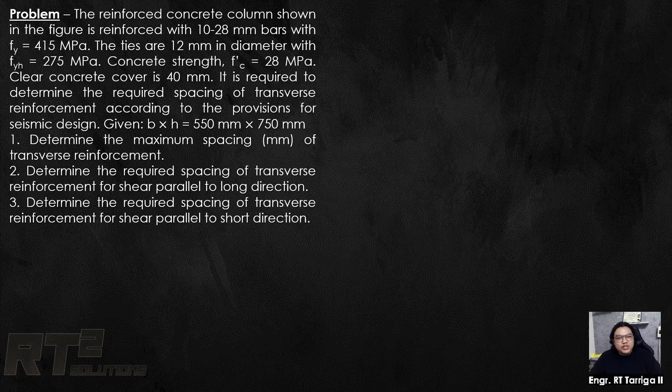So the reinforced concrete column shown in the figure is reinforced with 10-28mm bars with Fy 415 megapascal. The ties are 12mm in diameter and Fy 275 megapascal. Concrete strength FC prime is also given, and the clear concrete cover is also given. It is required to determine the spacing of transverse reinforcement according to the provision of seismic design. Let me expound a little bit on that.

This type of column design pertains to special moment frames - those which are permitted to resist lateral loads such as earthquakes. Back when the special moment frame wasn't invented yet, the only thing resisting lateral forces were shear walls. So if you imagine past codes, past buildings, the shear walls back then were much thicker than what we have now, because that was the only thing resisting lateral force.

But now, of course, the frames are there anyway, because a building is composed of many frames, in two directions, many frames, beams or frames. There's already columns and footings there, so might as well use them to resist earthquake or lateral forces. That's why it is called a special moment frame.

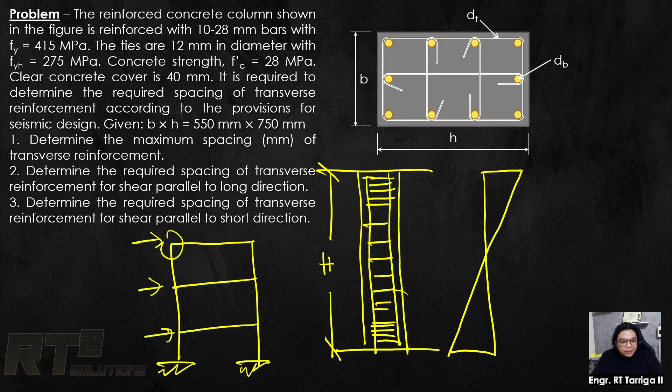And the second reason is, in a frame - let's say that is a frame - the lateral forces are distributed to act on the joints of the beam and column. That's where the large shear really is, where the lateral force will act.

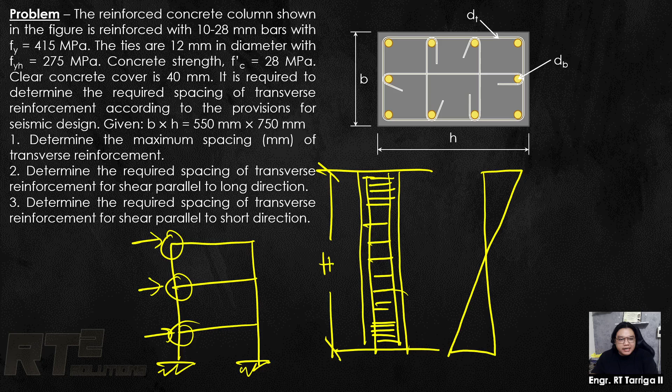Okay, so that's just the quick background. Now, before we can solve this one, there's actually a code attached to this. Don't worry, for the board exam takers, the code will be provided during the exam. All you need to do is be familiar with how to use it, and what notations are being used in the formulas and what they mean. I'll be discussing those.

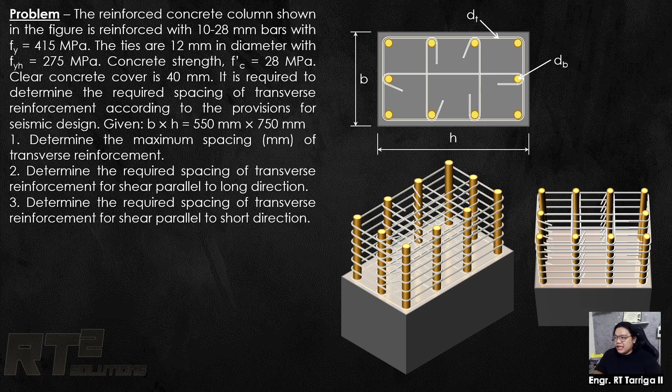So, the question is about the spacing of this lateral ties. Okay, next, columns for special moment frame.

So, spacing of transverse reinforcement shall not exceed the smallest of A through C.

Let's say here, first, 1/4 of the minimum column dimension. So you can see here, you have an example of a column section. Most likely, the minimum dimension would be B, with respect to the scale of the column, B by H. So 1/4 of B.

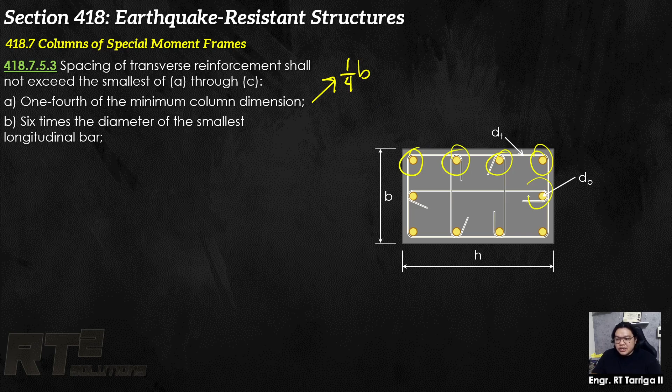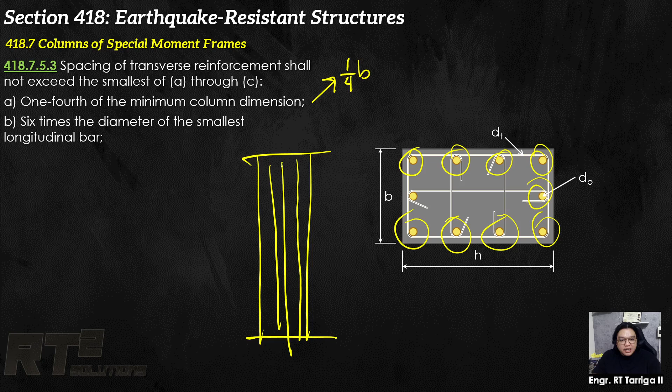And then the second one would be 6 times the diameter of the smallest longitudinal bar. So these are the longitudinal bars. If you look at it in longitudinal view, the column, those are the parallel, upright column reinforcement - those are called the longitudinal reinforcement. On the other hand, what we call those on the other side, the ties, those are the transverse reinforcement.

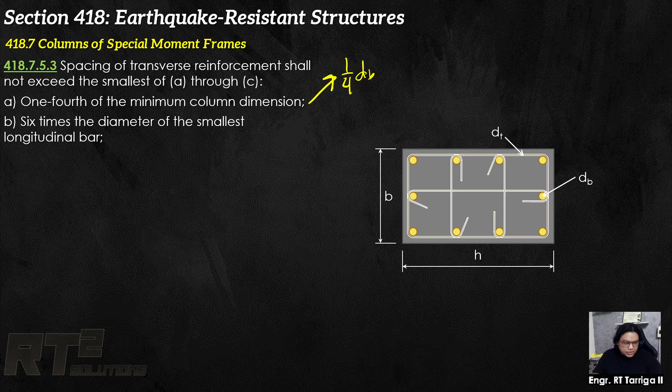Transverse, okay. So let's continue. Part B is 6 times the diameter of the bar, the diameter of the longitudinal bar. Then C is SO, where it will be calculated with this formula.

100 plus 350 minus HX over 3, for SO - these are the criteria, A, B, C. But for this SO, it shall not exceed 150 mm and need not be taken less than 100 mm. So therefore, before you compare SO to A and B, you will determine first that your SO is less than or equal to 150 mm and not less than, it will be greater than or equal to 100 mm.

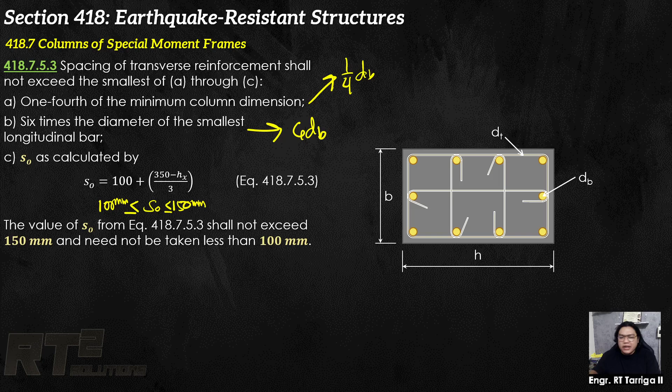Okay, so HX is the maximum center-to-center horizontal spacing of hoop or cross-tie legs on all faces of the column. Later I will expound on that one. How do you get HX?

So on the other hand, this is the maximum - you should not exceed this. But it doesn't mean this will be the required spacing. There's a difference between required and maximum.

Because, let's say the maximum spacing would be 100, or 120 mm the maximum. Then you found out the required spacing could be 90. So 90 would be chosen, because you didn't exceed the maximum. Then required is 90, right? It doesn't mean that when it's required, it's the maximum. They are two different terms.

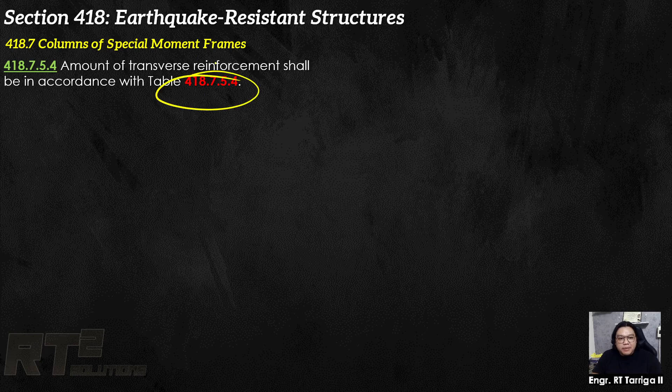Now, how to determine the required spacing? You will base that on a table, 418.7.5.4. So that's the table. Just take a peek, later I will discuss all of this.

Okay, so for most of the board exam, usually the FC prime is low strength concrete only, not high strength concrete, not more than, less than or equal to 70. So most likely we will just focus on A and B for the tied column. Anyway, this is the tied column, and this second one is for the spiral column.

That's the tied column and spiral column. And also, we will be focusing only for spiral on D and E. The ones on C and F, those don't come up. So let's focus only on A, B, D, E for tied and spiral column respectively.

Because if you don't know this class, it's also useless if this is given in the board exam. The code is being provided for the board exam. But if you don't know what is being asked for the notation, it's also useless, you can't solve it. Especially here, the terms are not really clear, because sometimes it's not clear, English, so to speak.

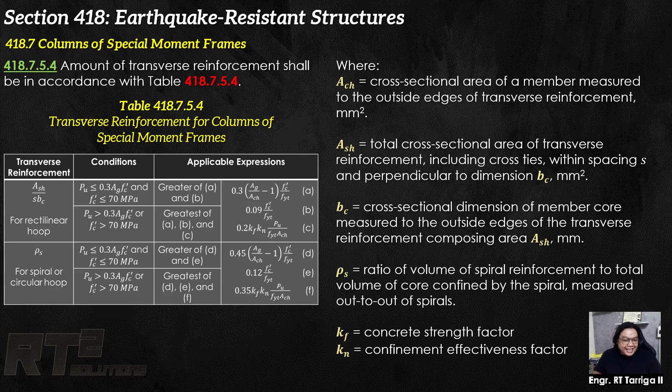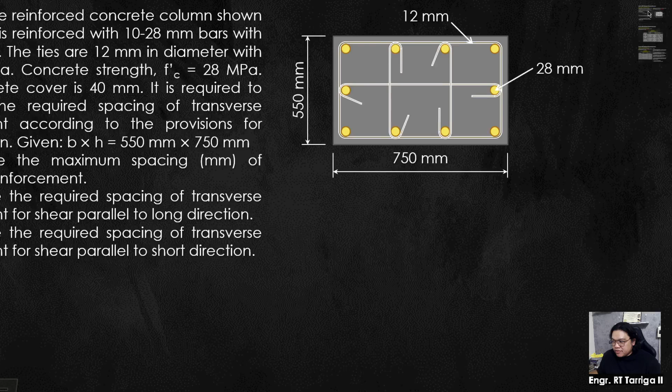Anyway, let's continue. Now let's first solve part 1, maximum spacing of the transverse reinforcement. So that pertains to here. This is what we base it on - these three: 1, 2, and SO. Three bases for us.

Well, for A and B, the first two criteria of this maximum spacing, we can actually solve already, because B and the diameter of the longitudinal bar are given. The only one we can't directly solve is SO, because we still need something, but it's solvable. Okay, solvable. Let's proceed.

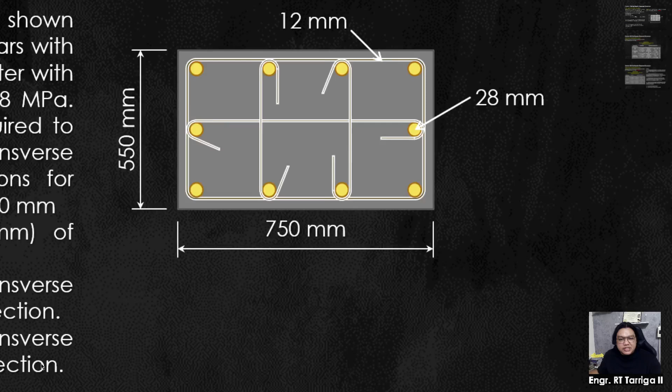First criteria. So the criteria, let me summarize based on the list: number 1, 1/4 of the minimum column dimension. That would be 550, right? So 1/4 of 550, that is 137.5.

Number 2, second criteria is 6 times the diameter of the longitudinal bar, which is 28mm. That would be 168mm. Actually, if you imagine this part 2, cross it out.

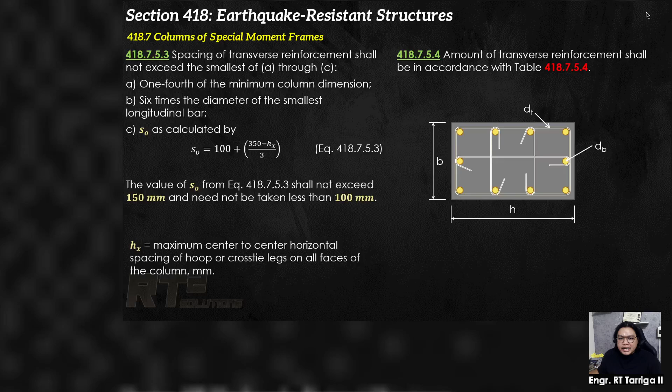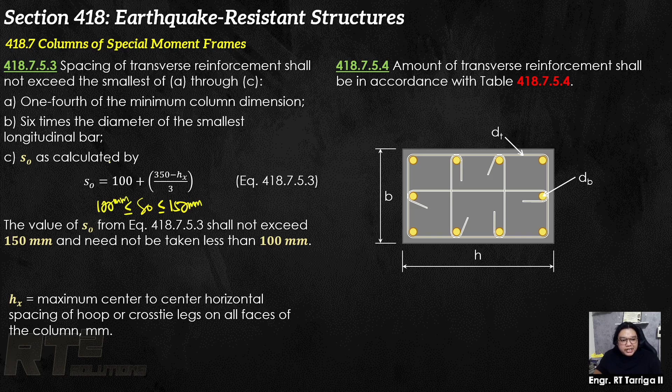We won't use this. Why? Because if you observe, the code mentioned earlier that SO should not exceed 150. I mentioned that earlier. So any spacing that exceeds 150 will not govern as SO. So 150 is really the maximum. I hope that's clear. This 168, we won't consider it.

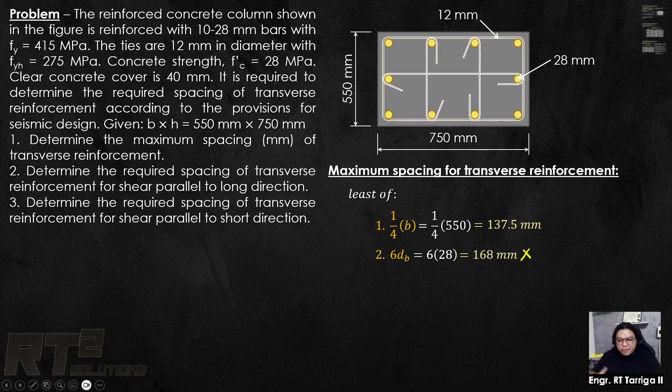What we'll compare now is criteria number 1 and criteria number 3. This part 2, criteria number 2, is gone - greater than 150, so it won't govern. We're down to SO. So the question is, what is HX?

What is HX? It says here: maximum center to center horizontal spacing of hoop or cross-tie legs on all faces of the column.

Let me clear this. These are the outer hoops, the ones surrounding. These single legs are called cross ties. There are many terms for this especially in actual practice - single ties, inner ties, cross ties, many terms. These three are cross ties, and this is the outer hoop.

I hope you understood. Now, HX is the maximum center to center horizontal spacing, in all faces of the column - actually all of these, plus this, plus this. Actually there are 5. 1, 2, 3, 4, 5. Which one is the largest? That's HX.

That's HX. So it's a bit of a hassle, right? A bit of a hassle because you will check all 5 of them. But I have a suggestion here that might help us reduce the number of possibilities. Instead of 5, let's make it just 2.

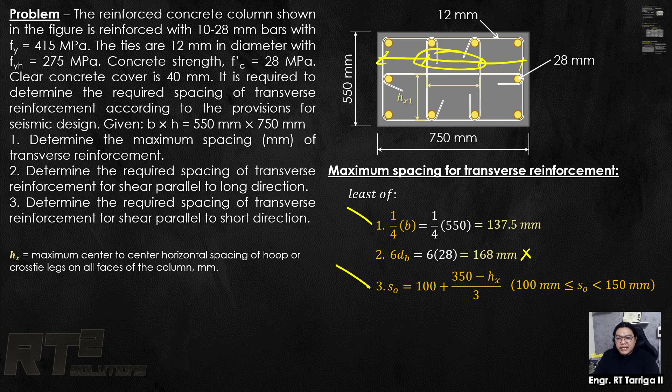For the horizontal, same thing - out of these 3, you pick one. Obviously this one in the middle is the longer one. That becomes the representation for the horizontal direction.

So out of 5, only 2 you need to check, which will become the larger value of HX that we substitute. I hope that's understood. But what really is HX? Center to center spacing, clear?

Center to center spacing. Now it's very convenient for us if we determine this first - I will call this Z, the center to center of the bar. Because class, if we have center to center of the bar, you just add half of the diameter on each side - half diameter of the longitudinal bar, and half diameter of the ties to solve for H.

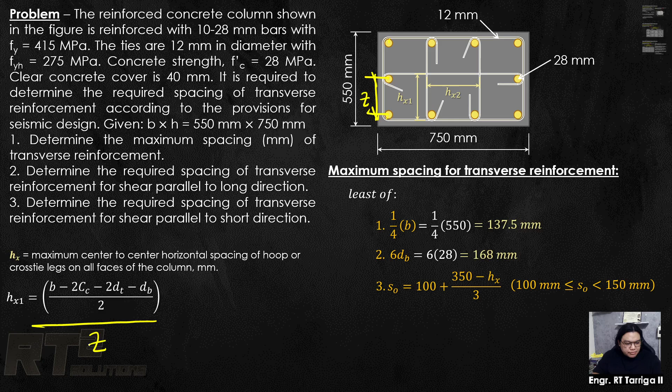Okay, therefore you can solve HX - 249mm, right? 249mm. So with that, you have 249mm.

HX2 now - actually same thing. This formula, just replace it with H, because that's already H. Replace it with H, then divide by how many spaces - not 2, but rather 1, 2, 3. That's the same thing, automatic, you get it.

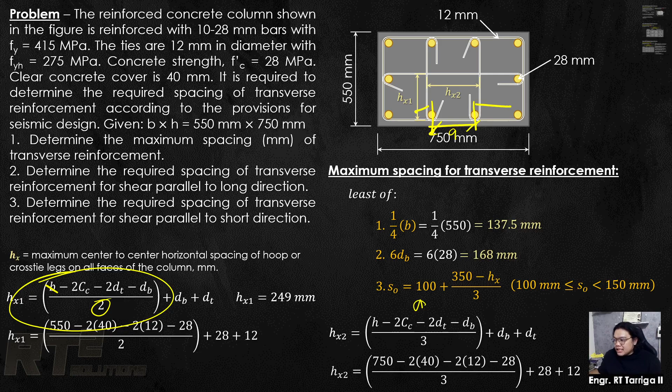We get 246. I'll give you time to internalize that - 30 seconds. You can pause this.

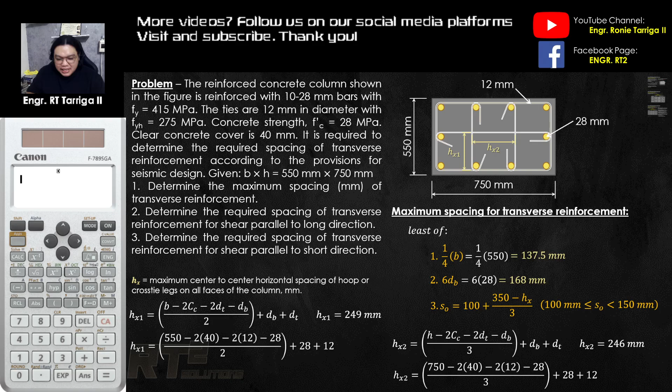So with that, substitute HX as 249 here. Substitute, you get 133. Now check, it's less than 150, that's okay. Then it's greater than 100, that's okay. So, this is really it.

It should be within 100 to 150. Now, compare S to 137. Actually, this is the governing value. S-max is 133.66.

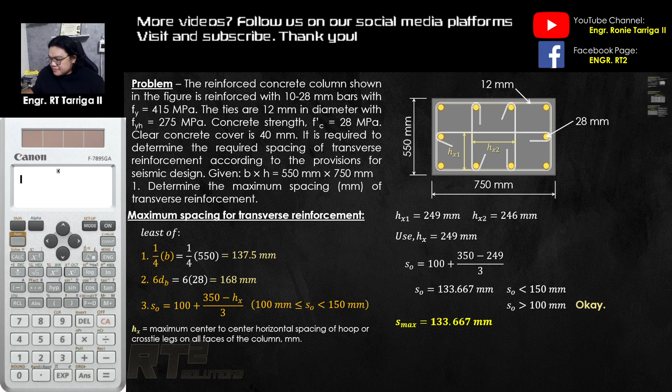I hope you get it. So what this means is the maximum spacing would be 133. So you shouldn't exceed 133. Maximum, okay, that is maximum.

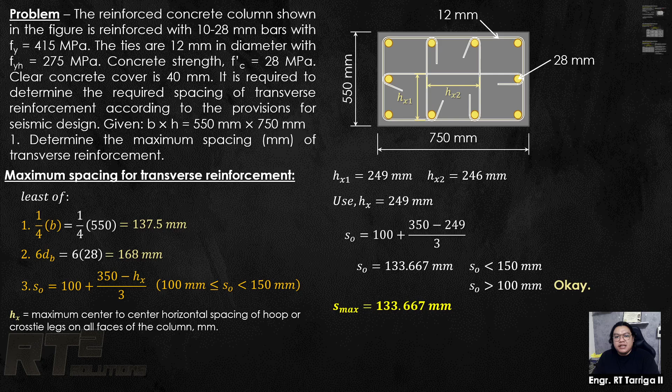Now for part 2 and part 3, you will calculate the required spacing. Number 2 asks: determine the required spacing of transverse reinforcement for shear parallel to the long direction. This shear is from earthquake, seismic, acts like a shear, lateral, shear parallel to long direction.

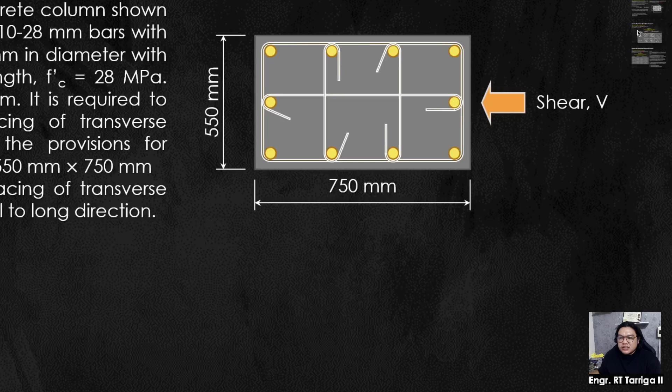What are our criteria for this required spacing? This is it, Table 418.7.5.4. We'll focus on the tied column here. So for transverse reinforcement, ASH over S times BC must be equal to the greater of A and B, these two formulas.

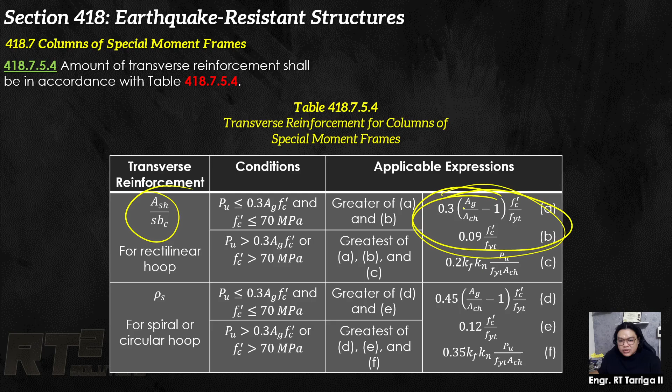Whichever is greater, use that to solve for the spacing. That's it from this table, from the code. This is what we consider. Equate ASH to these two, that would be our two criteria for the required spacing. I hope that is clear.

So the question is, do we know the terms ACH, ASH, BC, AG? This one, the gross area, is probably the only one we already know.

ASH, this is given, FC prime, FYT. FYT would be the FY or the steel yield strength of your transverse reinforcement, that's why it's called T, transverse reinforcement. Okay, let's go one by one.

Let's start with ACH. It is the cross-sectional area of a member measured to the outside edges of transverse reinforcement. Actually, this is called the core area.

Just subtract the clear cover and that's it. That is the cross-sectional area. So in this case, to remove the clear cover, we get X and Y. The area of X and Y, that is ACH. Let's start with X: 750 minus two clear covers.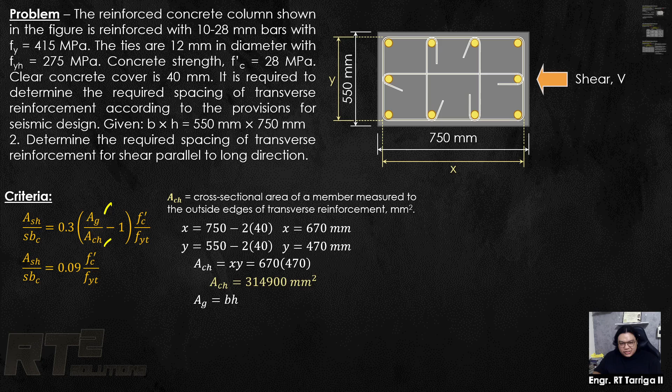Okay, that's the core area. Then, don't forget the gross area, because that might not be solved yet. Gross area, B by H, meaning the total area. So we're good with this too.

Okay, let's solve ASH first. This is BC, this is BC. It's perpendicular to the shear direction, including the reinforcement 1, 2, and 3.

I hope that's clear. So BC is like Y minus one tie diameter, center to center. Parang HX but hindi kasama yung cross, between outer hoops lang, between outer hoops. I hope that's clear. So as you can see, meron tayong ASH, meron BC, AG, ACH, kompleto na.

We can now solve for the criteria for the spacing. Ready? Let's solve. So if you can see, criteria number 1, let's solve this.

Substitute ASH, S unknown, BC. This naman is AG, this naman is ACH, FC prime, at saka FY. Masolve, lalabas yung spacing.

78.252 mm. Not yet the answer. Not yet the answer. That's the first criteria. The second criteria is this one.

0.09, 28. Okay, ASH, BC. Solve for S. Siyempre, the closer the spacing, mas safe. You will use the smaller spacing that governs, para safe.

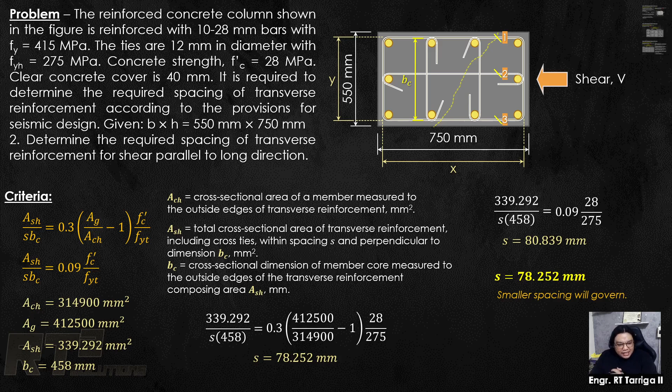I hope that's understood. Okay.

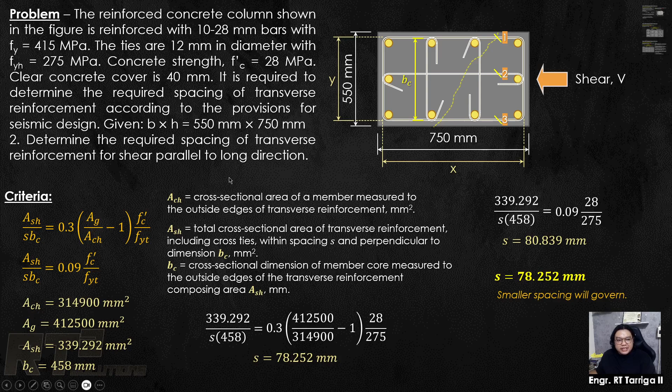Next one, I think this would be the last number. Same question, but the shear now is parallel to the short direction. Short direction. Okay, same criteria, class, same criteria.

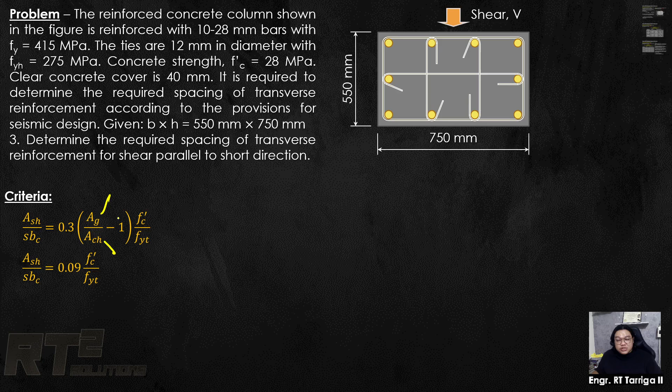And actually, regardless of the direction of the shear, itong si AG and ACH will not matter. Pareho pa rin yan, hindi mag-change. Ang mag-change lang, dependent on the direction of the shear, would be ASH and BC. So ito, wala na to, okay na to.

If you got it once, then you can use it twice for the short and long direction.

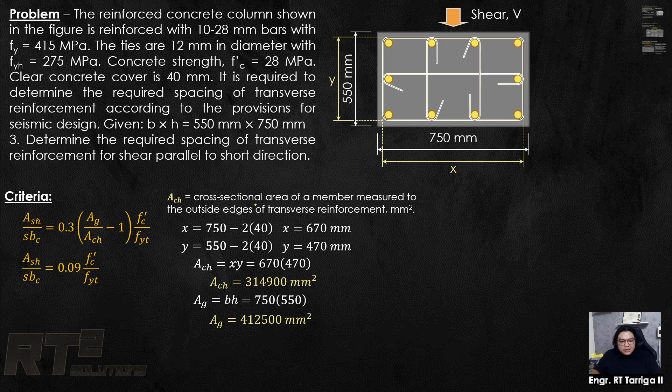Okay, let's solve ASH and BC. Obviously naman, kasi dito naman yung shear, count mo lang yung parallel na mga reinforcement, yan na yung legs. Actually 4. No? 1, 2, 3, 4.

Okay, so ito yung crack niya. 1, 2. I hope na-gets. Okay, so with that, 1, 2, 3, 4.

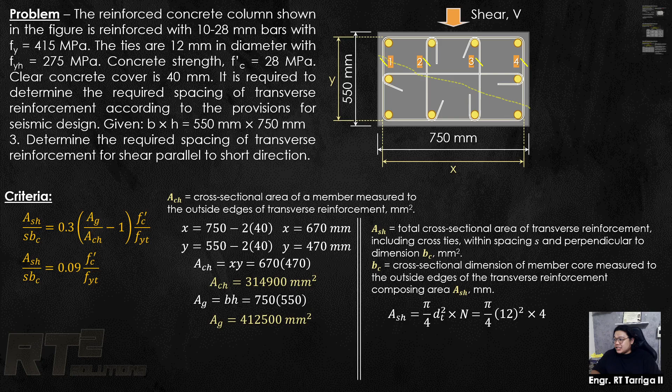Yan yung ASH, 4 legs of the transverse reinforcement. Then si BC, ito naman, always perpendicular to the direction of the shear. Yan si BC, so center to center spacing yan, makukuha niyo.

Alright. Then criteria number 1 and number 2, same thing. Diba? Napakadali, class, kapag alam mo lang kung ano to, mga notation dyan, easy as that.

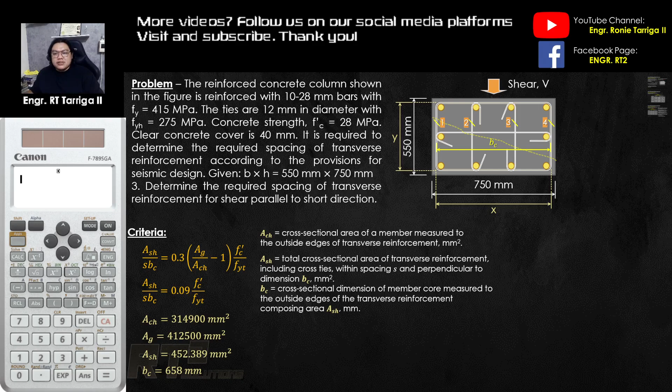Lalo na merong code sa board exam. So actually, for the board exam, class, yung merong code, take advantage of those. Dapat alam nyo talaga how to use the code, kasi bigyan na kayo ng guide eh. Diba? Take advantage. Merong mga code, dapat sure kuha nyo.

Yan talaga. No? Okay, solve for S for the first criteria, 72.6 mm. Then for the second criteria, that is 75 mm. Of course, 72.6 mm will govern.

Alright, now question. What if yung tinatanong, kasi malabo ganito gawin ng yung katanungan. Malabo kasi, what is the spacing kapag long direction? What is the spacing kapag short? Hindi sinasabi yan, sinasabi lang, ano yung required spacing ng transverse reinforcement?

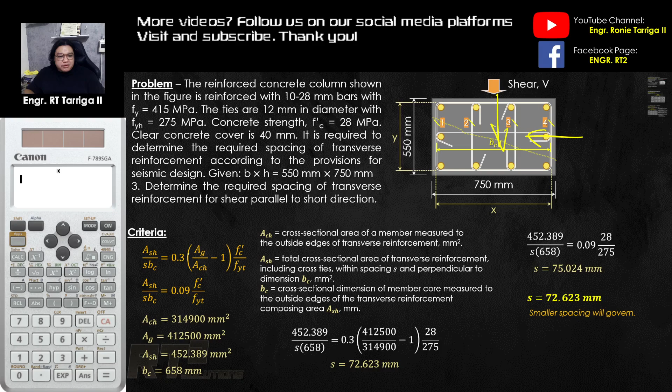Then ngayon, dalawang possibility, isang paganyan and isang paganyan, along the long direction and along short direction. Do you need to solve both? Medyo time consuming, kasi marami kang dadaanan, no? Twice mo gagawin, okay? Twice mo siya gagawin.

So with that, meron akong suggestion sa inyo. Palatandaan din, okay? Kasi if makita nyo dito, yan, no? Ito yung sa long direction, ito yung short direction. Sir, do we need to check both always kapag ganyan?

Actually, no. Ang technique ko lang dyan, class, ako personally, technique ko dyan, sino yung mas malaking B, siya yung mag-govern. Kung sino yung mas malaking BC. Tignan nyo dito, 458, dito, 658. Kung sino malaking BC, siya mag-govern.

Para hindi mo na to i-solve. Natanong, what is the required spacing of transverse reinforcement? O kailangan mo to i-check dalawa? No, time consuming. So ito, X na yan, ito. Alalahanin mo ano yung larger BC. Larger BC, yan yun, okay? Larger.

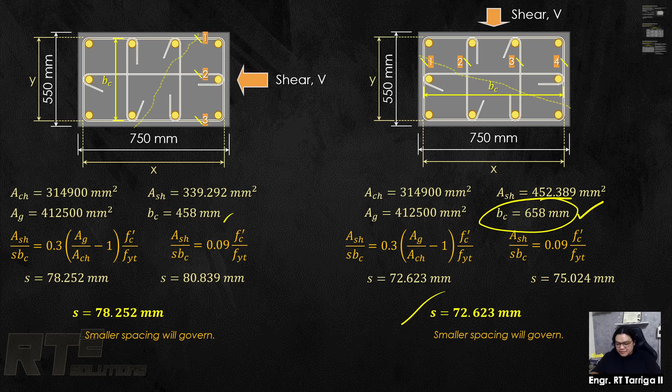Hope that is well understood. And I guess that's it. Alright, so nakapag-record na din.